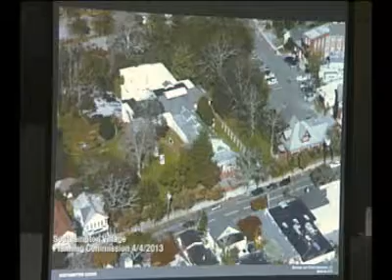Let's talk a little bit about the history of it and where it sits in the village. What you see here is the site and its boundary, which incorporates the Parrish arboretum as it is today. Its entrance sits on Job's Lane—not its original entrance, but its last entrance to date. It sits in the heart of this mega block, which has been the focus of our master plan developments.

One of the key aspects of the master plan was to break up this mega block into two blocks through creation of a new street that connects Nugent Street to Windmill Lane through this block, shown here as this blue line, starting from West Main Street. I'd call this Parrish Lane for the time being.

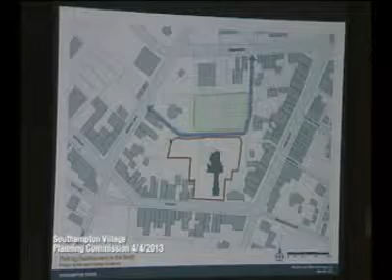Right now it's part of the parking, but this is going to be an official mapped new village street and lane. The parking off of this will remain as is, except that with the master plan's approval, the parking will extend to consolidate private parking in the back and rear of all the properties on Nugent and Windmill. Future development or redevelopment of these properties will push them to the street, with their rear yards incorporated into the village's parking.

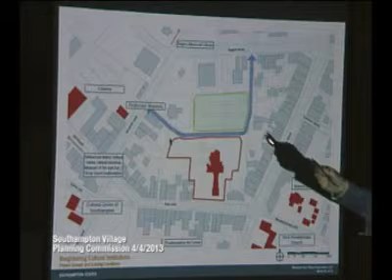You can see how the Southampton Centre on 25 Job's Lane is so critically and centrally located in relation to numerous other cultural institutions—primary among them the Southampton Historical Museum, the First Presbyterian Church, the Rogers Memorial Library, which moved to the Nugent and Windmill Lane intersection, the Cultural Centre in Southampton, the Shinnecock Nation's Cultural Center down the road on Hill Street, the African American Museum of the East End, which is in development, and Stony Brook Southampton and the movie theater—institutions that will basically all be tied together as part of what we consider a village arts district.

In addition, you can see the network of pedestrian infrastructure in the village existing today, and how this will be further expanded and tied to the Southampton Centre.

The potentiality of all these pedestrian walkways, the new street to the north, and providing access to the building from all sides creates a building that is very much visible, not only from Job's Lane but from all around it. From any angle that you look at it, this building will be very visible.

And to that extent, it's almost a building in the round, where the issue of accessibility and getting access to the building is not limited to one side, but primarily all sides of it.

This is an aerial view of the existing museum. I'll present quickly a history of that. Let's move on to the next slide.

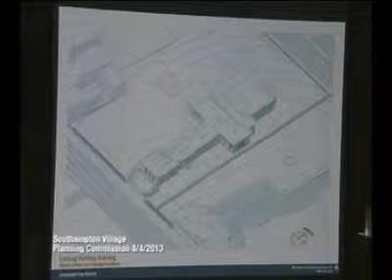The original building, which we call the Transept Gallery, was first designed in 1897 by Grosvenor Atterbury, the architect that Mr. Parrish used. This was basically this section here with the main entrance on the east side. That's in relation to the rest of the existing building today.

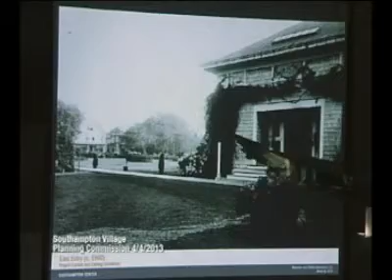Here's a historic photograph of it before the additions both to the north and south were added. Here's another view of the original entrance on the east side. Job's Lane is down right over here. This was all the grounds of the Arboretum at the time. From Job's Lane, you could access through this walkway, which exists today, to the eastern entrance of the building.

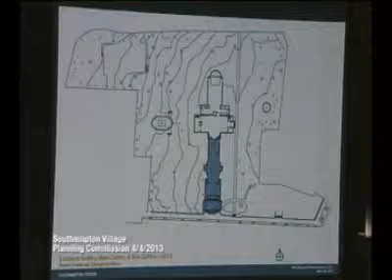Finally, in 1913, the main gallery toward the southern expansion and Job's Lane was added, with a new entrance gallery on Job's Lane with a forecourt that completed the plan—the crucifix plan—and at the moment was called the Parrish Center of the Arts.

This was the last section added while Mr. Parrish was still alive—the entrance with the forecourt off of Job's Lane, bringing a new architecture and entrance to Job's Lane. I can see the influences from the Italian Renaissance, which reflected the majority of the collection that Mr. Parrish brought to this museum.

Later, in 1956, '72, and '87, additions were added onto the building. We call them the West Annex. These were mostly functional additions—architecturally, they're not significant.

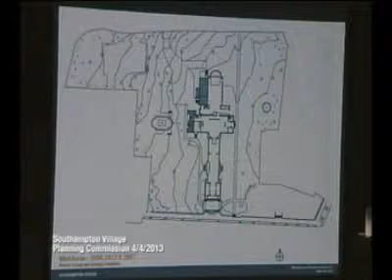They basically address the issues of additional need for office spaces and storage for art. In the 1950s this portion was added, and later on in '72 the other one. And there's the 3D versions of it.

As you can see, as far as architectural compatibility, there's none of that. The additions that were to the north and south, did Atterbury do those additions? Absolutely. Atterbury did all the architecture that was implemented in the original 1897, 1902, and 1913.

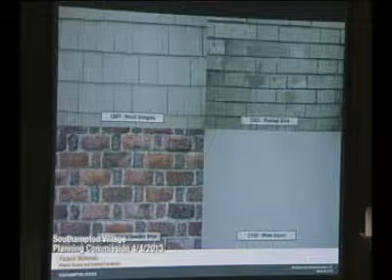Another view looking from the parking lot to these Western Annex additions. These buildings, which we'll consider the museum as one building, is actually an addition of a number of different buildings. Even though the same architect Atterbury was involved in the design, he used many different materials. Originally it was wood shingle in 1897. In 1902 it's white brick. And finally the famous Atterbury patterned 1913 addition that brought the addition to Job's Lane. The '56 annexes are white stucco.

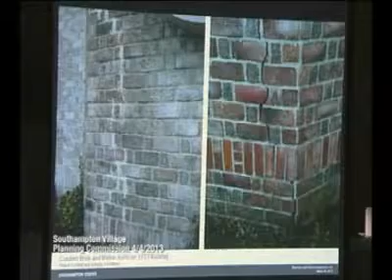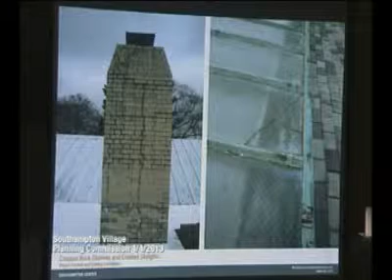The existing building's integrity and bones are in pretty good condition, but there are major problems with every aspect of it. It really has not been looked at, improved, or maintained throughout all these years. As you can see, the paint, the surfaces, the brickwork are all in desperate need of work. You can see cracks in the foundation in certain areas. All the skylights are either closed up because of leaks, and the roofs are in very bad condition.

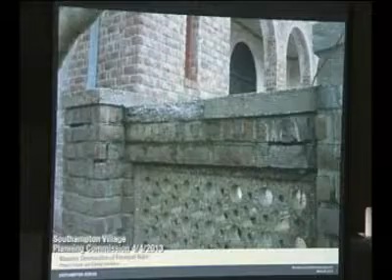You can see over here the roof on the 1913 addition, and this is the central section roof. Also the forecourt, the brickwork, the caps and so forth, all throughout the winters and summers and seasons have taken the toll on this section.

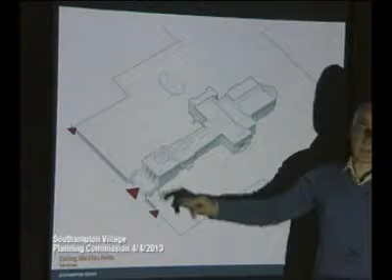Let's talk about site access a little bit. Going back to the 3D form, presently the building is accessed mainly through Job's Lane, with secondary entrances to the Arboretum on either side of the main entrance on the south, and also from the parking lot there's a path that brings you through the Arboretum and through a gate to the forecourt and then into the building. The other original entrances, even though one is operational, are usually closed and only scarcely used, to admit wheelchair accessibility issues.

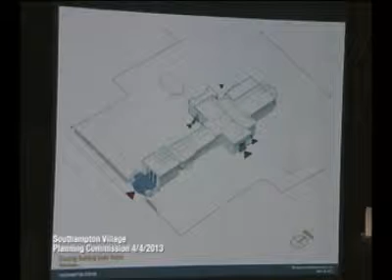So this is where the accesses are today, and the potential additional accesses are to improve from both the east side, from the grounds of the Arboretum, and from the parking lot. The existing building has 4 entries: the main one on Job's Lane, the secondary one which is the original entrance on the east side - this is the handicap access today - the staff entry on the western side, and another entrance to the library, which is actually the reading room, presently closed off.

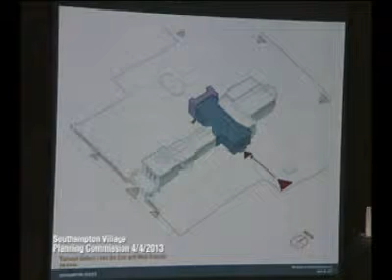Let's go back one slide. We're looking into the possibility of how we can create these additional entrances, opening them up and making them accessible to handicap wheelchairs. One of the main tasks is also to create a connection between the east side and the west side of the property and the Arboretum. This is basically an attempt, through architecture and the main portion or transept portion of the building, to achieve that.

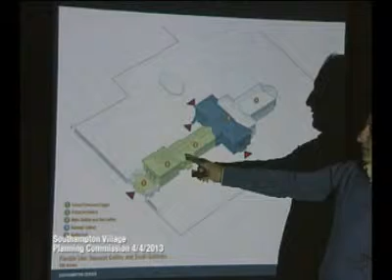Let's move on. So here are again the various portions of this building, which we'll call a campus of buildings that are interconnected to one another: the auditorium, the transept gallery, the main galleries, and forecourt and loggia with the entrances. Let's keep on going.

So here's our restoration and preservation strategy. First and foremost, it's removal of some of the elements that were not part of the original architecture of the building, which are the additions made back in the 1950s and 70s, and removal of the parking from the grounds of the Arboretum. This brings the building back to its original Atterbury state, basically.

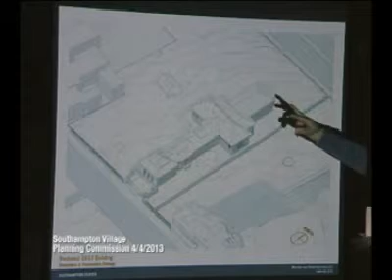By taking away those additions and incorporating the grounds of the parking, we're basically expanding the Arboretum and bringing the building back to its original 1913 shape. Here's an elevation view of the current elevation with the 1950s and 70s additions. And you can see that by removal of that, you're exposing the original facade of the 1902 addition and the 1897 original transept facade, which there are no photos of at the moment.

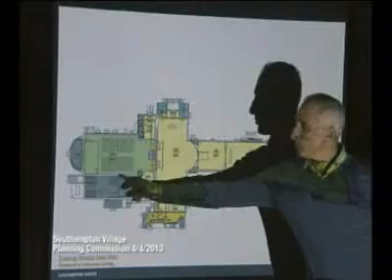Again, this is the existing plan of the building. These are the 2 sections that were added later on, not by the architect Atterbury. Let's move on.

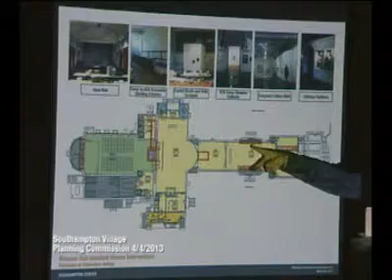On the interior of the building, there are certain elements that are not original to the building, which will be removed as part of this restoration strategy: the shops and the separations between these shops, the walls that close off the side entrances, the ramp, and another ramp back on the auditorium section. The auditorium's apse itself is closed off, and that will be removed.

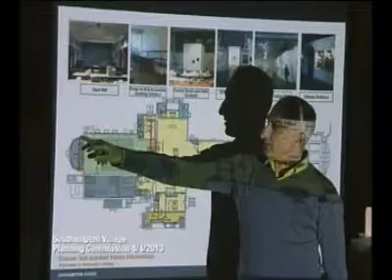Also, the exterior additions of the 50s and 70s will be removed, bringing the building back to its original 1913 format. The apse will be removed? No, it's the wall that separates the apse, not the apse itself.

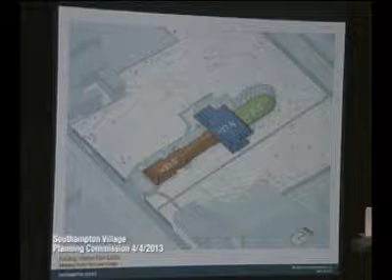The building itself, built in 3 different stages, is also at 3 different elevations, which is a major problem as far as accessibility. The original section is at 27'8". The auditorium drops to 26.5, and the last section is somewhere in between, actually at elevation 27.

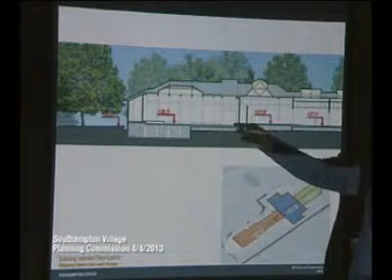You can see the effect of some of these changes of level and the ways they've tried to bridge these differences through ramps of this nature, about 10.5 inches. This is a section through the building, showing variations in the floor. So one of the first tasks for the architects was: how can we make this building accessible?

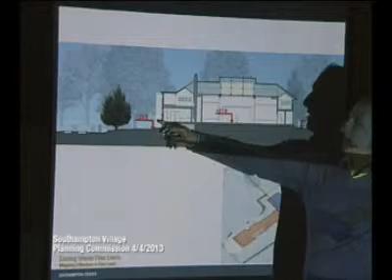Before the solution, a cross-section through the building was very informative. This is the elevation at the transept at 27.8. On the eastern side of the building, the elevation is at 25.3, versus the western side which drops to 23.5. So there's much more of a difference between floor levels on the west side versus the east side, making the east side an easier approach for bridging and making the building accessible.

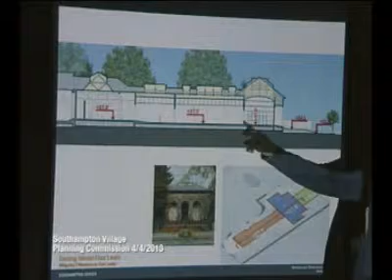Same thing from Job's Lane, which is a sidewalk at elevation 21. We have to get to existing elevation 27 as far as accessibility, and how that would be resolved is a concern.

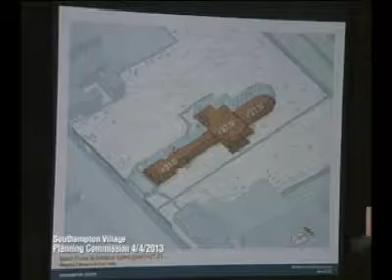The architects basically proposed to bring the elevation of all the different levels to 27. That would be an elevation that not only minimizes the difference between the exterior and interior, but also brings all 3 different levels into one and makes them accessible. I'll show you how they've approached that.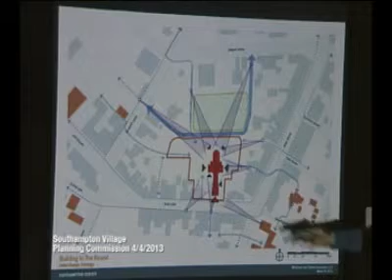Going back to the idea of the building in the round, by creating a level floor plan on the interior and creating various paths and access points—such as from the pedestrian path we finished this past summer, the parking lot access from the back, and also from Job's Lane—gives the opportunity to improve and make the accesses to the building more accessible.

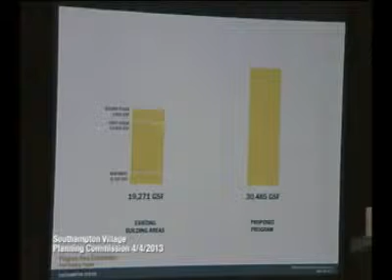As far as the building program, the existing building is approximately exactly 19,270 square feet, of which only about 3,600 is on the second floor. About 13,000 is on the main floor, which is the bulk of the building. There is a small basement on the northern side of the building at about 2,790 to 2,800 square feet.

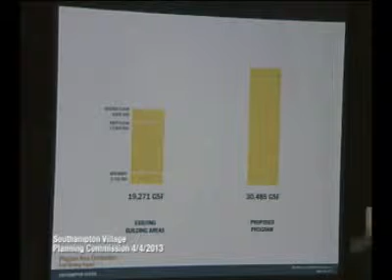The proposed program, which is basically a performing arts center and theater, increases that by about 10,000 square feet to 30,485. The breakdown of this new program: the majority of these additions go into mechanical, services, and support spaces for the theater—green rooms, changing rooms, stage support areas and so forth. The rest, the flexible spaces, remain pretty much the same.

A small cafe will be introduced. The Peconic Public Broadcasting will also be partners with us in this. There's a visitor center where you can access various programs in the village as to what's going on, and a small area for the staff. So this is a plan and site plan of the restored 1913 building.

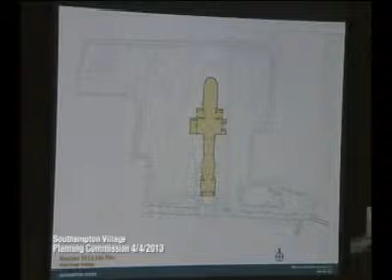This is the improved performance space, theater space to the north of it. These are, programmatically speaking, the areas where we need support for the theater, which are the green rooms.

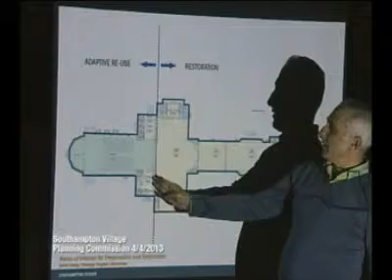The strategy is that if we were to draw a line separating the northern addition, which is the 1902 addition, from the rest of the building, this portion to the north is an Adaptive Reuse project, where we're converting the auditorium into a theater, and the southern portion is focusing on restoration of the existing, bringing it back to its original.

Laura? Are they going to be attached? I'll tell you as we move on as to how that's going to be worked out.

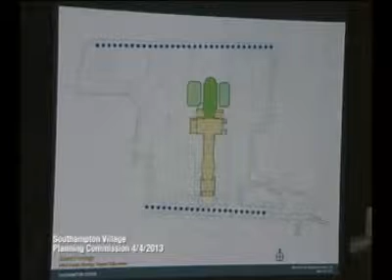So here we're addressing the issue of street frontage and accessibility again. Presently, Job's Lane is the main street frontage and access point for the center. With the creation of the Parish Lane to the north, that will introduce another access point.

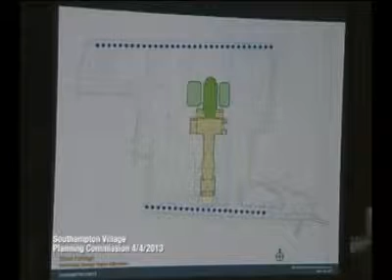Presently, the entry vestibule on Job's Lane is there. Let's move on. With the new street coming over there, we're introducing another architectural feature on the street to have a presence for the center on the new Parish Lane.

That's also bringing all the floors to elevation 27 and making them accessible, and extending that elevation 27 all the way to the grounds to the northern property line. Not by a building, and I'll tell you as we move along how this will be done.

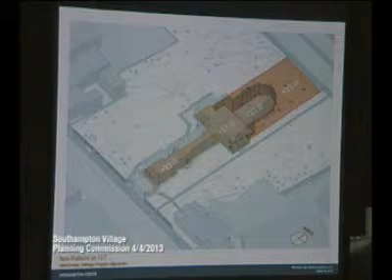But the issue is that by creating and extending this elevation 27 to the parking lot, the building will be accessible throughout. What's the elevation of the parking lot? The elevation of the parking lot is slightly lower than 27, and I'll tell you how we'll bridge that gap too.

Also another thing that is being proposed is that the existing auditorium, being at elevation 27, will be dropped to elevation 14.5, which is a level below, what we call today the basement level.

This way, we're first of all raking the floor of the theater, which is what a real theater has, a raked floor. And with that, we'll afford the possibility to provide infrastructure for the theater, such as the green rooms and all the storage facilities and additional facilities required, not on the grounds of the Arboretum, but below grade, so they won't have a presence.

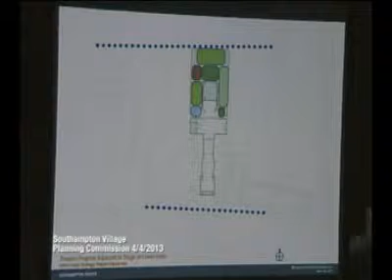Let's move on. So this is exactly a programmatic distribution of these required needs for the theater space, and again, the theater wing addition.

Now I'm going to talk about going back to 1902, when the northern addition was designed by Mr. Atterbury, and before the southern section was added on to. This was the layout at that time. Let's move on to the next slide.

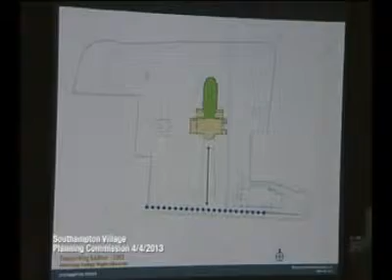Mr. Atterbury made a proposal to Mr. Parrish for a courtyard on the south side of the building. So again, go back to the slide.

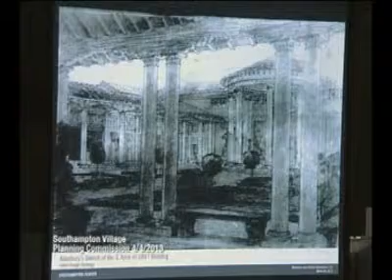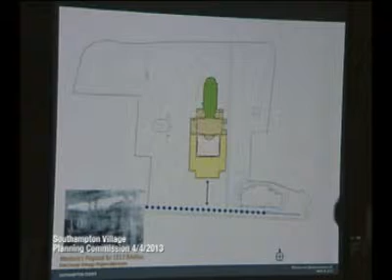You can see this is the southern portion of the building with the apse, and what he proposed was to create a courtyard around that apse, including some additional buildings and grounds of the Arboretum. Let's move on. So this is what he had proposed for addition to the existing building back in 1913.

This never occurred, of course. We know that he built a longer linear building that brought the entrance all the way to Job's Lane.

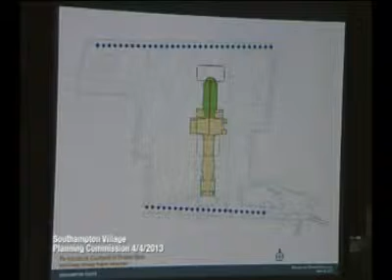But the architect is taking a page out of Mr. Atterbury's book, using the same concept of a courtyard and projecting it on a new street frontage to the north off of the existing apse of the building.

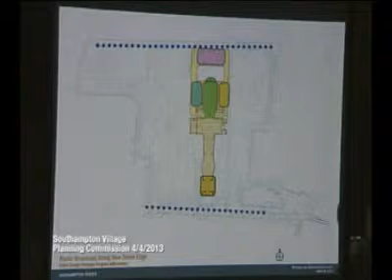Let's move on. So you can see that this courtyard is created around the northern apse in this case, with the broadcast, radio broadcast functions on the Parish Lane parking side, bordering the courtyard off of the northern apse of the existing building.

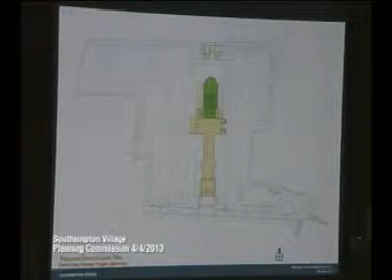Flexible spaces and a cafe are added on either side, on the east and the west. These are very transparent spaces, all glass, so that through the glass you can see the original building again. I'll show you some schematic drawings of that.

So again, this is a conceptual 3D drawing of what we call a pedestrian plinth at elevation 27, which ties itself to a structure off of the Parish Lane, which is housing the Peconic broadcasting facilities.

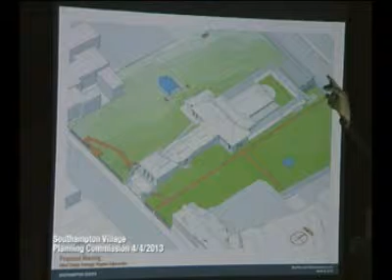And through this plinth, basically through a ramp, you bridge the gap between the parking and the plinth. Once you get onto this plinth, basically the whole building is accessible. That's a one-story structure, and I'll show you some more drawings of it. Yes, one-story structure.

So if we look at the breakdown of the new program, the lower level takes the majority of it, which is all the support structures for the theater: the green rooms, the storages, the offices, the bathrooms, and so on.

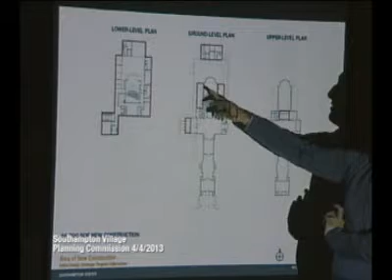The main floor, ground level, which is on the Arboretum and the main building's floor plan, are the two additions to the east and the west, which are flexible spaces for educational and arts. On the western side, it's the cafe.

On the northern side, it's the Peconic broadcasting functions, and a pavilion addition to the western apse of the transept, which opens up the building to the grounds of the Arboretum. And then a very small addition on the second floor for offices, which basically bridges the two existing office spaces at the moment on the building.

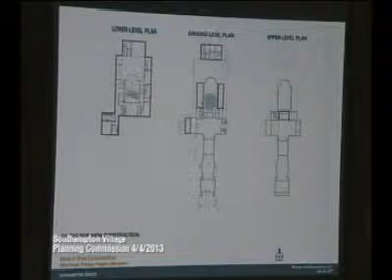If you go back one slide, the beauty of this configuration is that basically only 25% of the new program is at grade level. 75% of it is below grade and does not interfere with the grounds or the Arboretum.

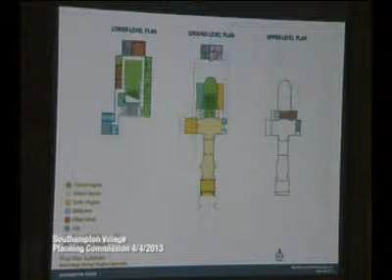Let's move on. Here's a schematic conceptual distribution of the different functions. The green is the theater program, flexible spaces is in light yellow, the darker yellow/orange is the public programs, bathrooms are in blue, office administration is sienna, cafe is in turquoise, and the public broadcasting booths in purple, and loading and mechanical is gray.

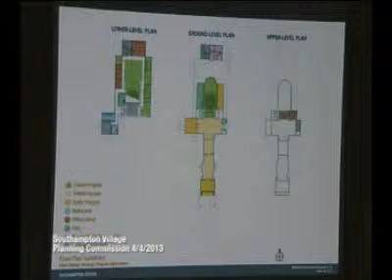And here are access points to the building presently existing as part of this. What's going to be improved is increasing the access points to the building from the plinth, from the grounds.

So the east entrance will be opened up. It will be access to this plinth and this walkway. There's going to be opening up to on the western transept to the grounds. The two side doors on the southern wing are going to be opened up, and of course the original entrance.

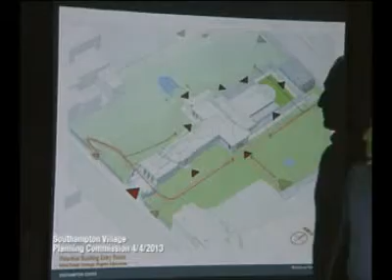And again, another entrance through opening up one of the bays of the retaining wall along Job's Lane. You have access to the grounds of the Arboretum, and from that, access through a handicap ramp to the western transept of the existing building.

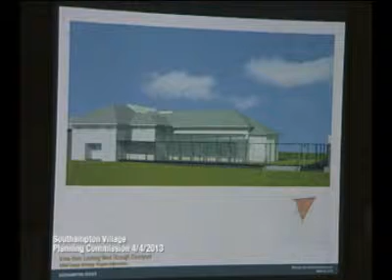These are the new additions, which are going to be in glass with the walkway, which is an open walkway on either side, basically off of it. And on this side, this is the Peconic Broadcasting booth off of that courtyard.

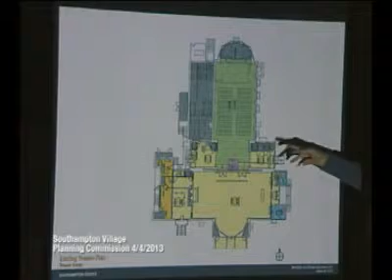Let's talk a little bit about the theater design. Again, this is the existing plan of the theater or the auditorium. The apse is closed off. These are the art storage areas existing.

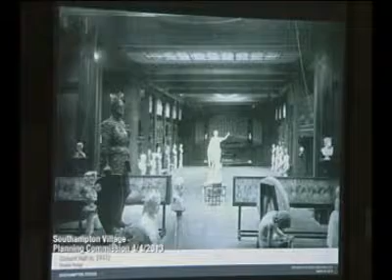This is a historic view of the auditorium as it used to be at the time of opening. This is the existing today. Move on. Some other historic photos of the auditorium space and how it is today.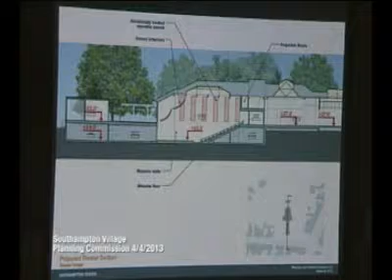Again, a longitudinal section cut through the building shows you the relationship of the theater to the rest of the building. And here's a cross section through it.

On landscape, here's an existing photo from 1912, before the southern addition was added, and how it looks today with the southern addition and the forecourt further down there.

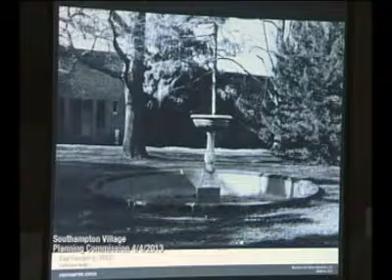We restored the eastern fountain last year, which will be followed by restoration of the western fountain on the other side of the transept. Here's the historic photo and how it looks today—overgrown. The original fountain, by the way, occupied the larger area you can see in this picture.

Here's a historic photo from 1912 and what it looks like today, basically taking down most of the trees and shrubberies that are in very close proximity to the building, which actually jeopardize the structure.

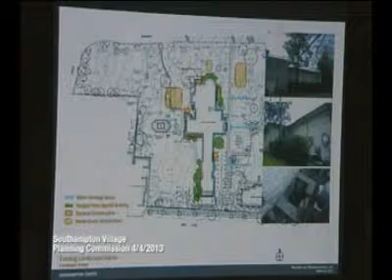Here are some examples of all the so-called garbage that has been collected throughout the years—air handlers, air conditioning units, pools for the fountains, pumps and so forth—which will all be cleared from the periphery of the building.

The grade would be slightly built up around the eastern and western side transepts, bringing it to elevation 27 and eliminating the four steps that are there right now, making those entry points accessible.

Here is the overall site plan of the proposed design, with the light blue designating the existing building and the white the new additions to the building in relationship to the site.

The proposed floor elevation for the radio station is 27, accessed again from the same plinth. So the radio station would still be at 27—correct. It'll be much higher than the parking lot.

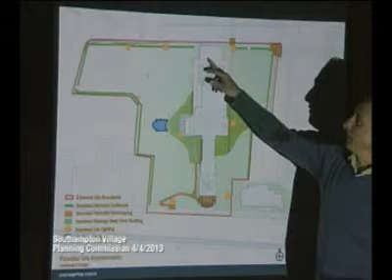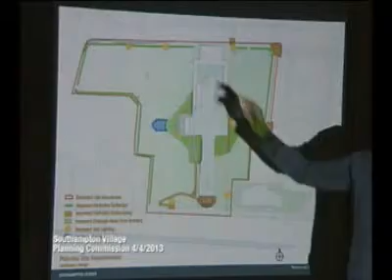If you go back one, this is at elevation 27. There is a ramp proposed here that would bring you to elevation 27, along with steps. From here, basically, the building would be accessed from the courtyard. There are also loading docks that have to be further developed on this side to access both the theater and the cafe supplies and so forth.

Are there any particular specimen trees that are going to have to be removed? There are no specimen trees that have to be removed.

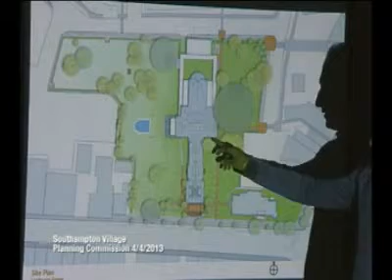The trees that are being removed, or have been removed, are the ones in very close proximity to the building that actually cause damage to the foundation, such as this one over here. This one was removed last year. One of these actually fell during the storm.

There's one tree that will be affected, at that point on the northern side of the property. What kind of tree is that one? I'm not sure what it is, but we have that information—I just don't have it right now.

I just had a thought—if the tree has to be destroyed, could we have the wood milled to use in the building? Well, that's a good idea. I actually know of a company that goes around, especially after storms, and collects old specimen trees, using the wood for furniture. Really, yes indeed—losing it, but it would live on in the building. Yeah, absolutely, it's a good idea. That's a very good idea.

The facades, other than the glass—are they all going to be the same now? I know each addition had a different material. No, the original materials are going to be restored. So there are still going to be three different kinds of material.

The white brick is going to be cleaned up—it's been painted over and will be restored. The original red brick was whitewashed back in the 50s. That's going to be cleaned up, bringing much more vibrance and color to the building.

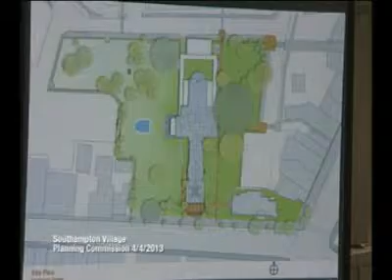The original section transept, which is shingle, is still going to maintain its shingle. The broadcasting addition is still design in progress, but most probably that will be something more in line with the masonry of the original building—though not the white brick.

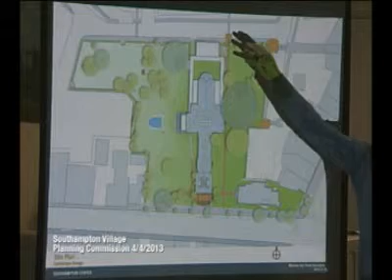From discussions with the architects, since Atterbury was very keen on creating various patterns with bricks, they are looking at that concept of using brick and being imaginative with the patterning on the northern property, to anchor the building on the northern side and create more of a presence on the parish lane.

I'm not a big fan of glass boxes, but that building, the pavilion, is still a work in progress as far as the scale of it and how the breaking of the massing would be done. That has to be further developed.

This building gives me a round feel, curved rather than angular, even though there aren't many round elements. The architect is looking into the colonnade enclosing the plinth and courtyard, wanting the columns to be specially cast and designed rather than stock columns. For the roofs of the cafe and flexible spaces, he's introducing curved rather than rectilinear shapes. This is conceptual design.

All of this has to be further detailed and developed. I'd suggest Googling Machado and Silvetti and looking at their other works, mostly museums, to see how they've dealt with similar issues in other projects. They've established their reputation working in historic buildings, restoring and then adding on to them.

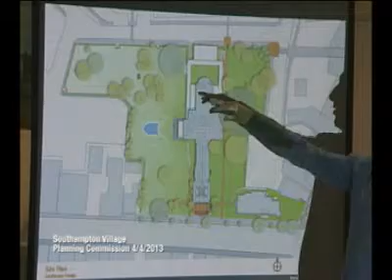That portion on the west side — the beauty of it is that by taking out these additions that were on the west side and the parking, the grounds of the Arboretum are expanded. This is the side where the cafe is going to be, and the cafe is a glass-enclosed structure. So once in the cafe area, you're exposed to all the Arboretum, and also to the afternoon sun, which will be very nice, with the walkway in front of it. There are also trees providing shade on the western side. For the first time, this building will offer the possibility to experience the grounds of the Arboretum from inside, which presently does not exist.

I have a similar comment about the shape of the northern addition, and also about access from the parking lot. I had more envisioned a second entrance from the parking lot, redirecting traffic more into the parking lot, whereas putting the radio station right there in the center and only allowing access through the ramps — I'm not so sure that's the wisest approach.

Well, versus this — let's go back to that slide — versus this structure becoming some sort of an entry vestibule. Yes.

The architect looked at many different options. At one option, we had the cafe at this point, for instance.

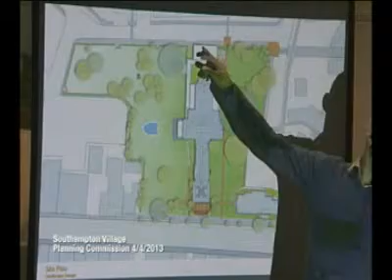As far as the cafe being over there, obviously from the point of view of servicing it would make more sense. But in relationship to the theater, when the theater is in use, the proximity to the cafe would not be very close, especially in wintertime, to go outdoors and then access the cafe over there. By bringing the cafe closer to the heart of the building and the transept area, it would be more functional in use. So again, these are concepts.

It's not finalized. The architect is still working on these things, and we have to also engage in more deliberations back and forth between functional needs and requirements of the radio station.

One of the advantages of putting the booth over there on the northern side is that they have all sorts of requirements regarding energy and electricity, especially in times of emergency when they have to be operational. That depends on generators not actually housed on the site here, but housed in the village hall, and how that would be connected to the broadcasting booth facilities while still maintaining independence from the rest of the Parrish museum or the Southampton Centre. These were all factors instrumental in making these decisions.

Why does that have to be on ground level? Why can't that be on an upper floor? The broadcasting booth is where, for instance, Bonnie Grice would be interviewing, and performers would come, and it would be a small space where they could do performances.

And also in summertime, this courtyard would be used as an outdoor seating area, which would still be exposed both to the booth and to the cafe. So the two are interconnected through the courtyard.

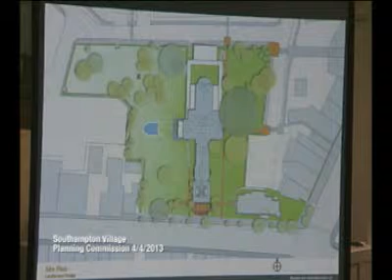Also, in terms of additional paths within the Arboretum, is this within the scope of the survey? Some of it is. The landscape architects—of course, this is only the preliminary schematic stage.

Some of the issues they're addressing right now are accessibility of the building through the Arboretum, which is basically, for instance, opening up one of the bays of the retaining wall on Job's Lane and creating an accessible path through that, connecting to the existing path. But as programs develop and the Arboretum develops further, that's something to be developed further. I don't think at the moment they've fully looked at the potential of how the different portions of the site would be accessed.

I think that will largely lend itself to the design of the Arboretum in the future, and the involvement, improvement, and development of the Arboretum. Something I've always pushed for, which still hasn't been developed, is the creation of a conservancy independent of the Southampton Centre that would look after the interests of the grounds of the Arboretum and its programming.

Well, looking good. I will update—I think the next presentation is sometime in mid to late May, at which point we'll get more details. That's some of the questions that were brought up today.